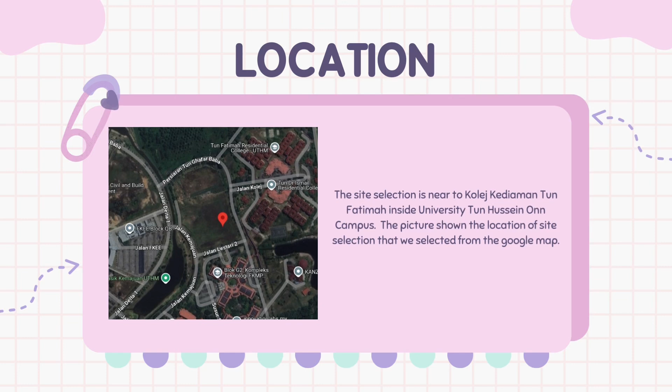Selection, which is cadangan menaik taraf kemudahan fasiliti sukan dan padang bola near Kolej Kediaman Tun Fatimah at UTHM. This is the project description. Our location site is at Parit Raja, Johor, which is a developed area. The site is building a sports project, and the challenges are environmental factors, weather conditions, and drainage effectiveness.

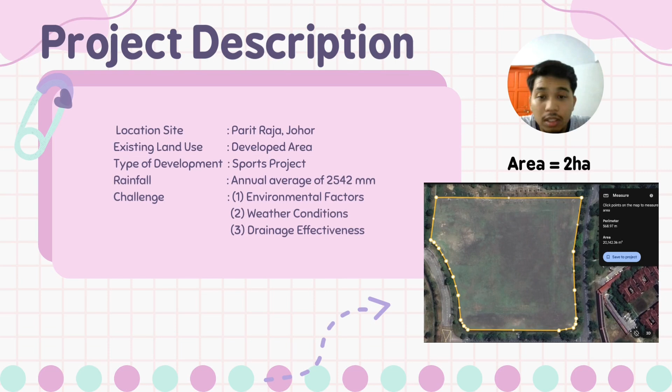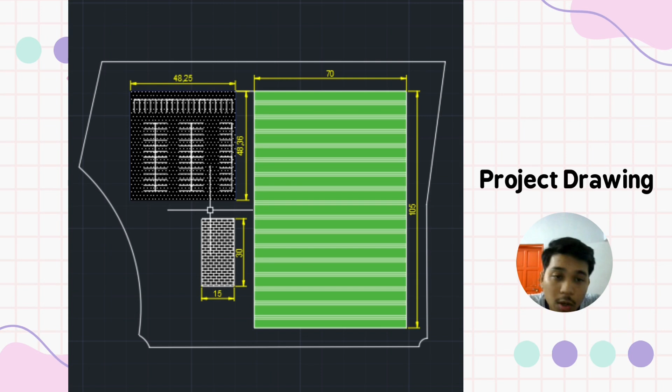Alright, as we know, our site is approximately 2 hectares, and it's big enough to build a field. And then here is our project drawing specification. We have a parking lot, 48.25 by 48 meters, and then we have a small building including the toilet and so on, which is 30 by 15 meters. And then our field is the original size, which is 105 meters by 70 meters.

Alright, this is our proposed drainage design. It consists of open U-drain, swale, and perforated HDPE. Perforated HDPE has holes in the pipe, so we will use this kind of pipe as a substructure. We will put it under the field and lay it as a herringbone system, so that even when we get heavy rain, there is no flash flood because this kind of pipe will catch the water easily, and if we play football there, the water can be absorbed immediately.

And then from the perforated HDPE pipe, it will go to our manhole, which is, as you can see there, between the building and the parking lot. We have a main drainage there, and then we have an existing swale along all the area. And then lastly, we have the open U-drain, which will catch the runoff from the parking lot. That's all.

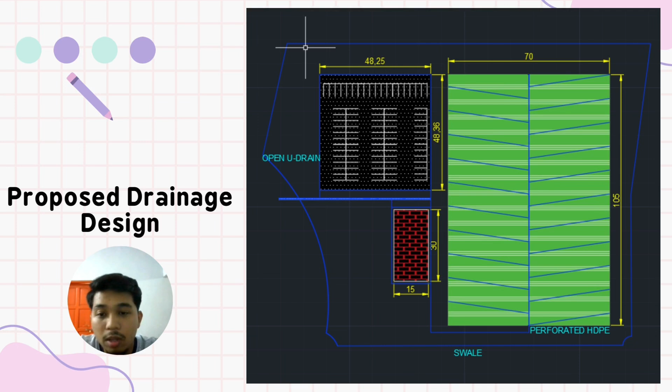The Malaysian Standard for Urban Stormwater Management (MSMA) Second Edition provides guidelines for designing pipe drainage systems to manage stormwater in urban areas effectively. From table 1 above, we have chosen the Batu Pahat station because the site selection is Parit Raja, Batu Pahat, which is in Universiti Tun Hussein Onn Malaysia, Batu Pahat. The constant value for this station is 64.099. The value of constant K is 0.174, theta is 0.201, and the eta value is 0.826.

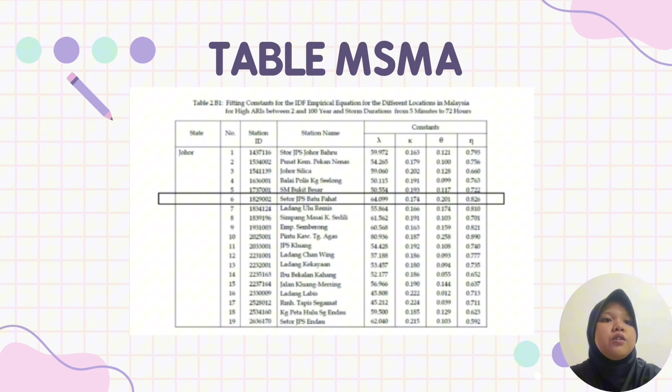From table 2, we chose a pipe material, which is concrete smooth finish, as our material for the proposed drainage design, and the Manning roughness n value is 0.015. The reason we chose concrete smooth finish is because concrete with a smooth finish is an ideal material for drainage systems due to its durability, efficiency, and low maintenance.

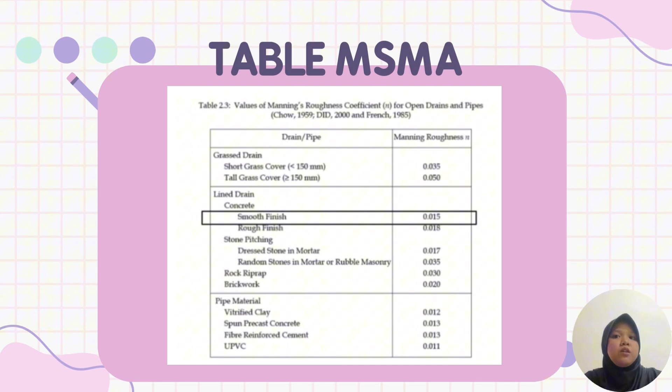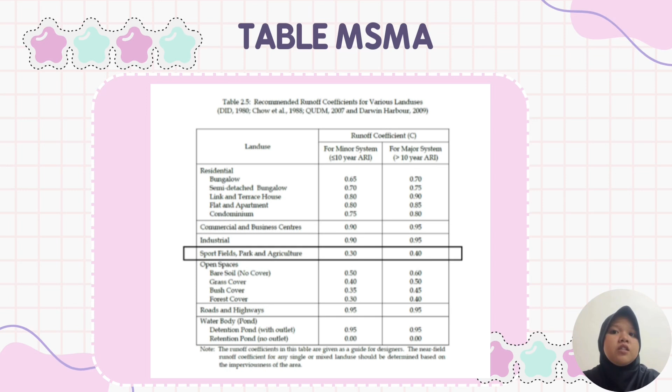Then from table 3, the value of runoff coefficient C is 0.40 for major system 10-year ARI and above for sport fields, parks and agriculture. The site that we selected, the sports field near Tun Fatimah College in UTHM, meets the requirements provided in MSMA Second Edition for stormwater drainage design. For a sports field, a higher runoff coefficient and 10-year ARI or above are chosen to ensure the drainage system can handle large amounts of stormwater.

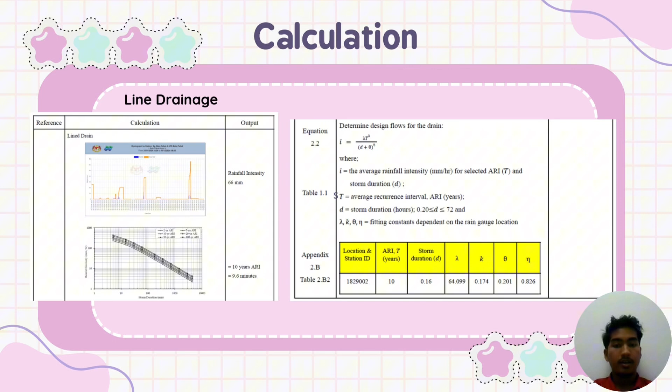Okay, today I will present the calculation for the drainage. Firstly, we got the data from Public Info Banjir, which is rainfall intensity, and the value is 66 mm in the district of Batu Pahat. And from MASMA we got 10 years ARI and 9.6 minutes. To determine the design flows for the drain, we use equation 2.2, which is I equals lambda T to the power of K divided by (d plus theta) to the power of eta. And from appendix 2B, table 2B2 in MASMA, we got the location and station ID that we chose at Batu Pahat. Next is ARI, storm duration, lambda, K, theta, and the value of eta.

Okay, next we put the value from the table into equation 2.2 to get the value of rainfall intensity, and we got the rainfall intensity, which is 222 mm per hour. Next, equation 2.3, which is Q equal to CIA over 360, and we got the value of Q, which is 0.372 meter cube per second.

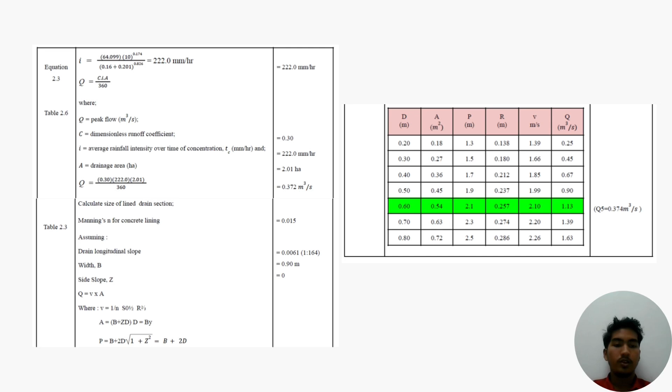Okay, the Manning's n for concrete lining we got from the table from MASMA, where we choose smooth concrete surface, 0.015. So we assume the slope, which is 0.0061, width 0.90 meter, and side slope Z equal to 0. As you can see from the table, we got the value of depth, area, wetted perimeter, hydraulic radius, velocity, and Q. So we got the depth of 0.60 meter as it meets the requirement.

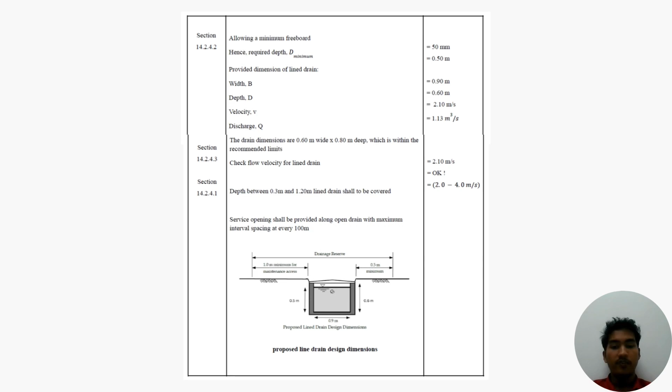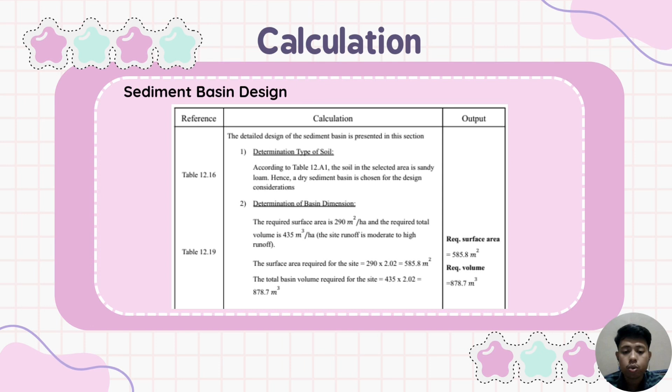Today I want to present the calculation of sediment basin design. For our project location, the soil is sandy loam, so the sediment basin that we must use is a dry sediment basin. For the determination of basin design, the surface area is 290 multiplied by 2.02, and we got 585.8 meter square. And for the total basin volume required, 435 multiplied by 2.02 equals 878.7 meter cube.

For the settling zone, the required settling zone average length we got is 49 meter, so it is okay. And for the average surface area, 49 multiplied by 15, we got 735 meter square, and it is much bigger than 585.8 meter square, which is the required surface area, so it is okay.

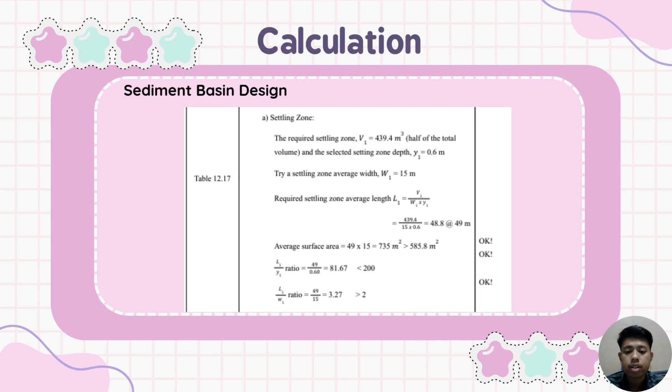For the sediment storage zone, the volume is 439.24 meter cube, and we use trial and error to find Y2, and lastly we got Y2 is 0.3 and V2 is 439.24 meter cube, and it is okay, because the V2 that we got is 556 meter cube, and it is much bigger than the required sediment storage zone volume.

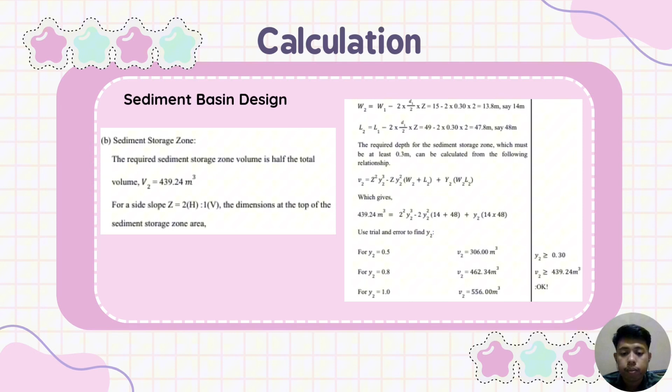For the determination of Q10, we use station JPS Batu Pahat, and the value that we got is 141.83 mm per hour. Then using the rational method, we got Q10 is 0.40 meter cube per second. And for the determination of Q riser, after using the formula for Q riser, we got Q riser is 0.23 meter cube per second.

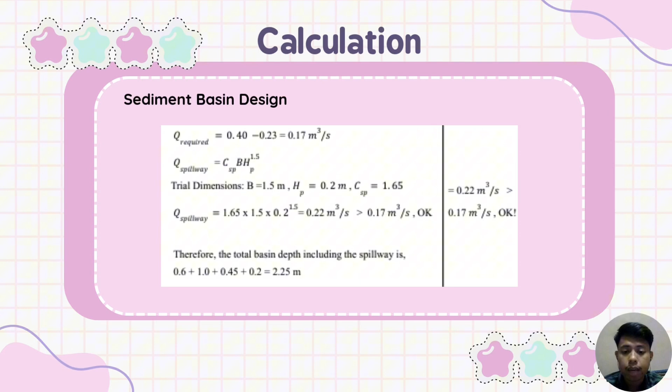For the Q required, we got 0.17 meter cube per second, and for the Q spillway, we got 0.22 meter cube per second. The Q spillway is bigger than the Q required, so it is okay. And then the total basin depth, including the spillway, after we calculate, we got 2.25 meter.

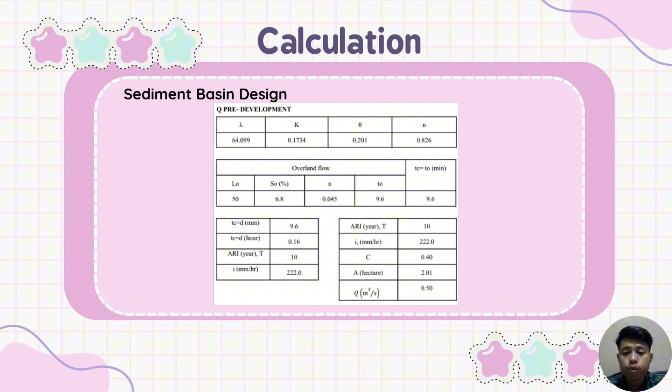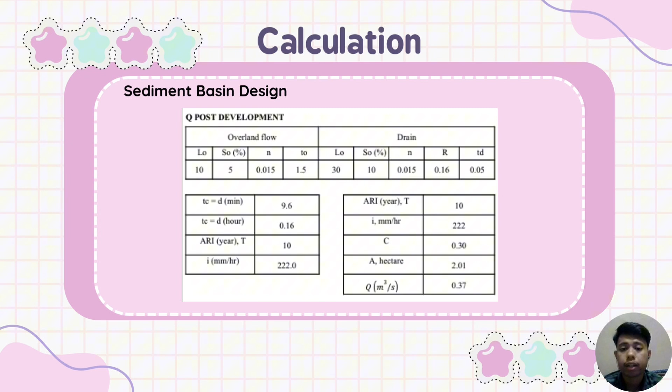For Q, we have two, which are Q pre-development and Q post-development. For Q pre-development, we got Q is 0.5. For Q post-development, we got Q is 0.37 meter cube per second. So this is the hydrograph sketch between pre-development and post-development for the sediment basin design.

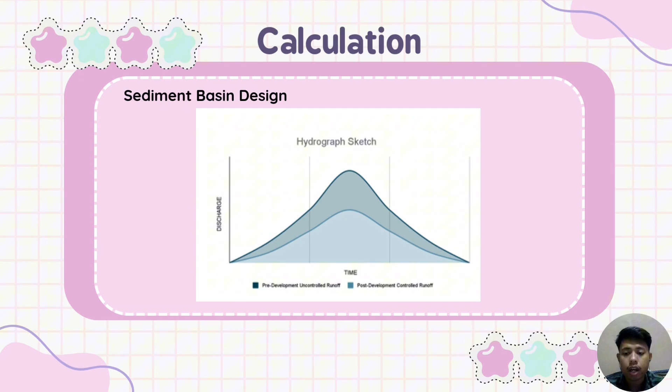As you can see, as the time increases, the pre-development and post-development Q also increase. As we can see, the post-development is lower than pre-development. This is because before the development, the flow may be polluted by rubbish, so the water cannot discharge fluently.